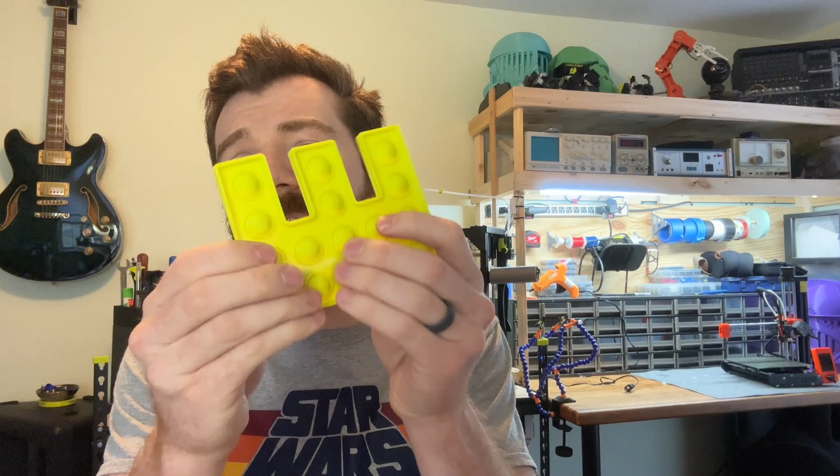In this video, I'm going to show you how to create your own custom 3D printed pop its using the Tinkercad design program. All right, now to start, we need a basic shape, and this is going to be the base of our pop it. And obviously in Tinkercad, you have a ton of different shapes to pick from under basic shapes and all the other categories.

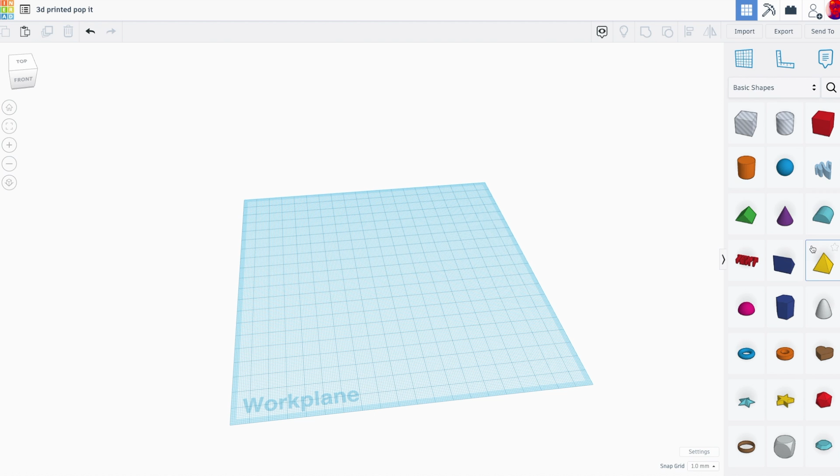You can grab letters and things and use your text box tools or create your own shapes using the scribble tool. I'm going to import a vector. Now you can create your own vectors using a free program like Vectr, V-E-C-T-R, which you can find on my website, or a more advanced program like Adobe Illustrator, or you can download vector images from loads of different websites. This is just a quick little vector E that I created.

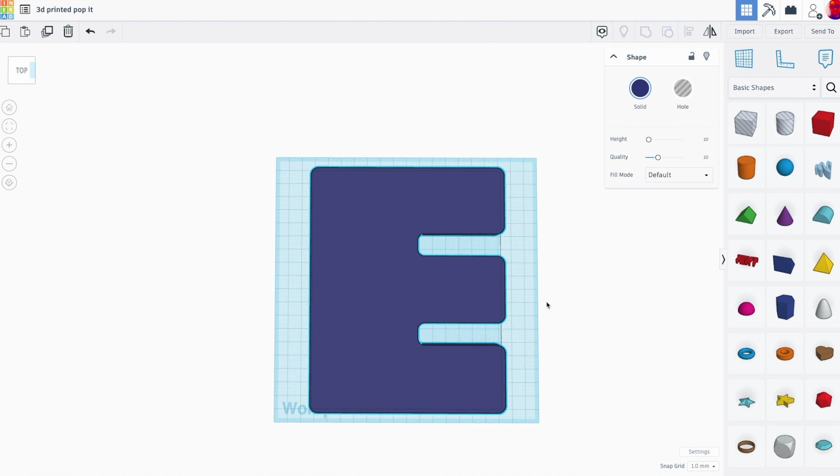Now, one of the first important things we need to decide is the size of our pop it. Now, I like to make my pop its around 5 or 4 inches, so I'm going to scale this thing down to be about 5 inches tall by about 4 inches wide, or 100 millimeters by 127 millimeters or so.

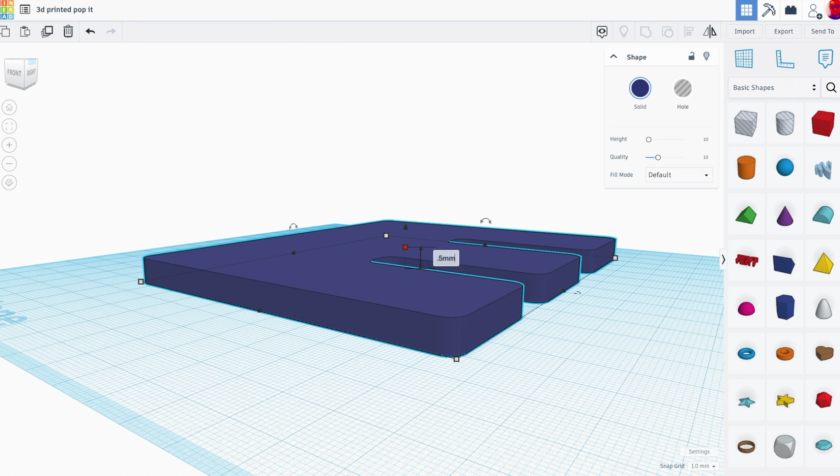Now, the next most important measurement is the thickness of our pop it base. So I'm going to set the base of our pop it to be 1.5 millimeters. And my initial layer is going to be 0.5 millimeters. So this is roughly 3 times the height of our initial layer, which is going to give us really good rigidity and really good bed adhesion. This isn't going to be the thickness of the pop it itself, but just a good thickness for the actual print.

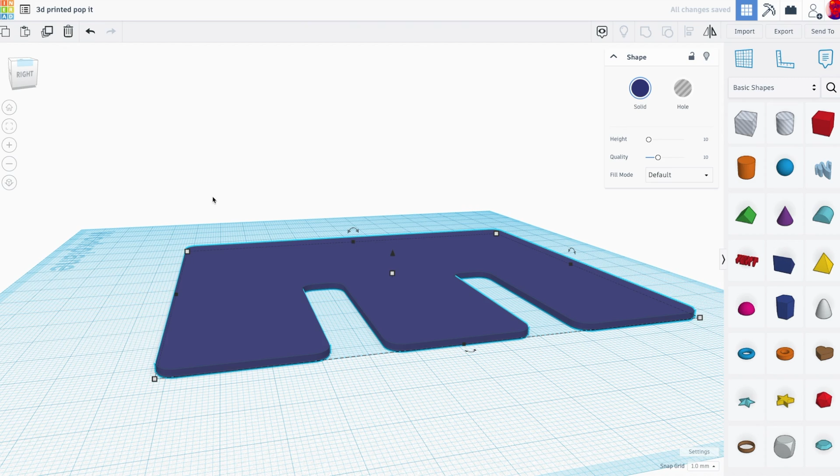Now, I'm going to duplicate this shape. And what I need to do is essentially create an interior offset. So I'm going to drag this shape in. And if I just change the color here so I can see what I'm working with, I'm going to drag the shape in to make it a little bit smaller all the way around to actually offset my shape.

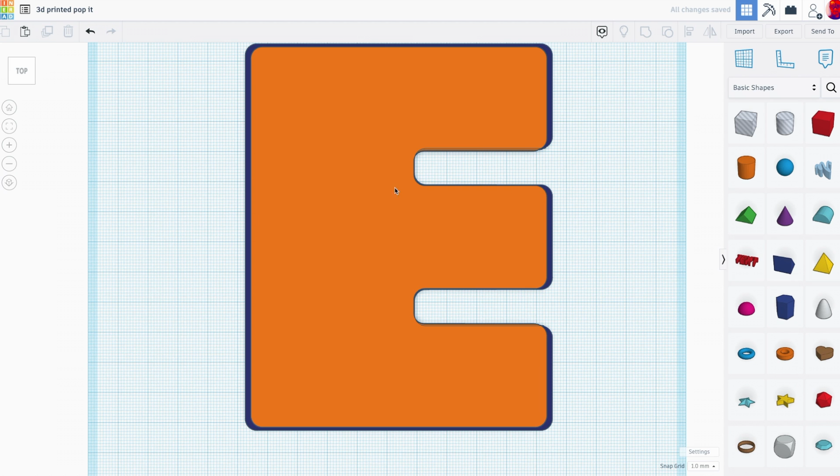Now, this works really great for the outside. Doesn't work super great for my E's. So if I center this, we can see that my outside has a good, pretty even perimeter, just like so. But my E's are a little bit off. So I'm going to actually separate this into multiple shapes. That's going to allow me to get a really good offset.

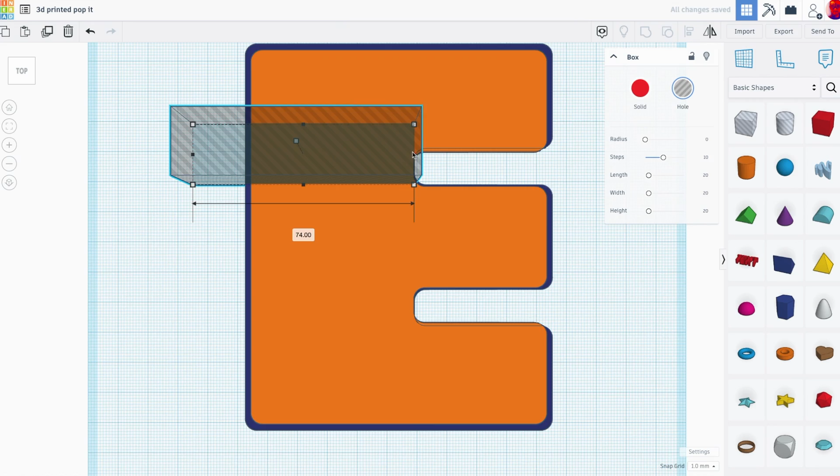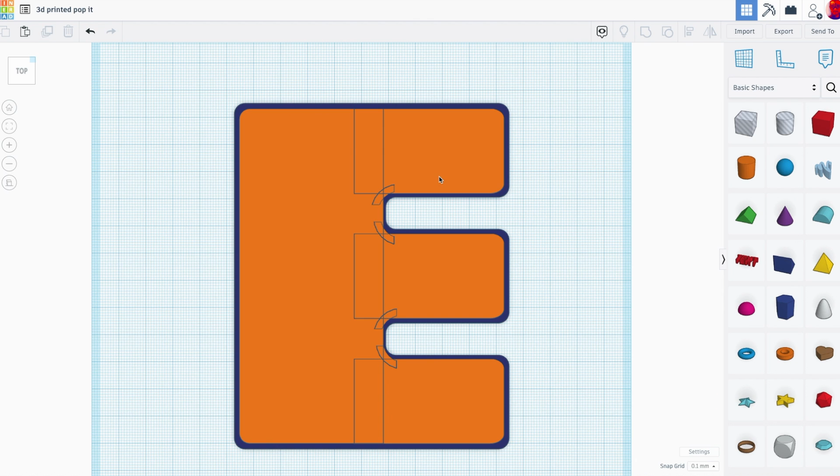Okay, so what I've successfully done is I've broken my shape up into multiple pieces and added some tubes here to give me a good interior version of my shape, which would have been a lot easier if I chose a basic shape or even if I created a vector outline manually. But in Tinkercad, breaking things up into smaller pieces allows you to do much more complicated things.

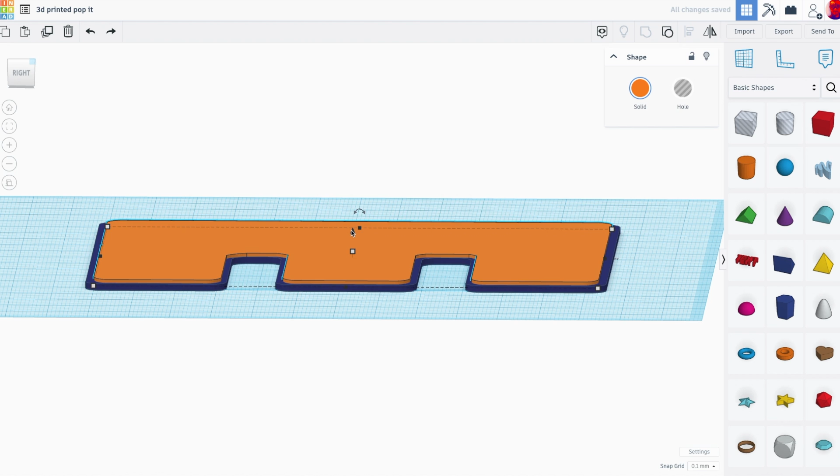So I'm going to select my interior shape, which is orange. What I'm going to do is I'm going to raise my orange piece so it is 1.5 millimeters off of the work plane, which should be right on top of the blue outer rim. I'm then going to make the orange piece very, very tall, and I'm going to make my blue rim 4 millimeters tall.

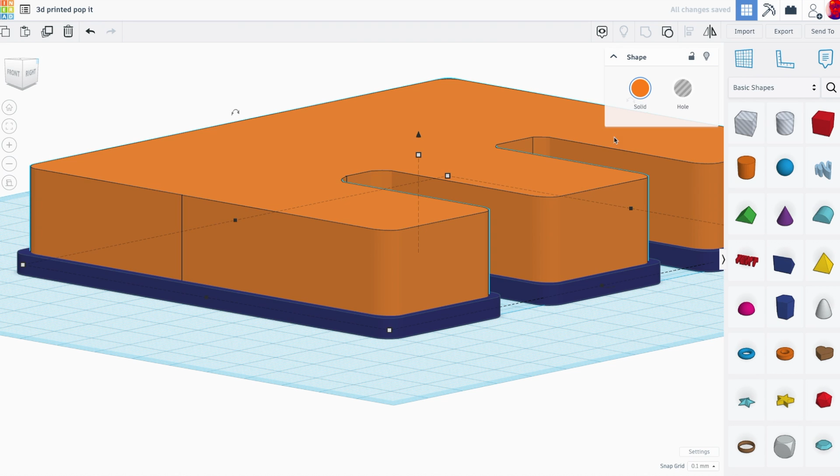I'm then going to turn my interior shape into a hole and group it with the blue shape, which now, if I make this lighter so it's a little bit easier to see, we have our original base with an outer rim. Pretty great. Now, the next thing we need to do is I need to go ahead and add rings around the actual poppets. So the rings are going to reinforce the poppet.

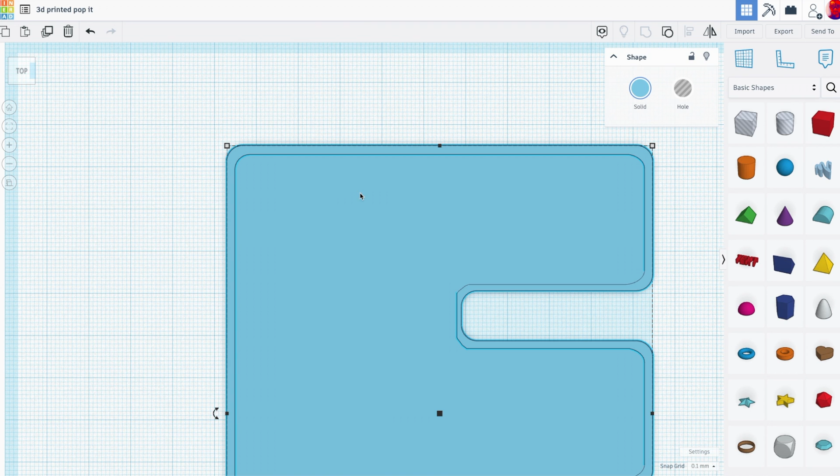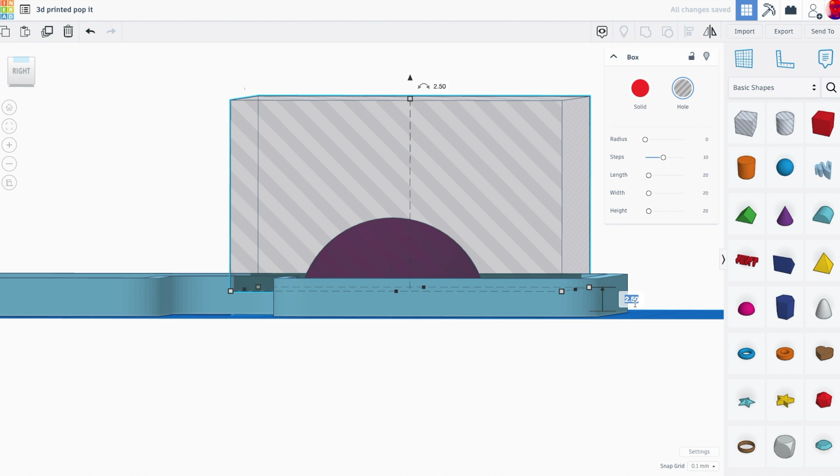So we're going to grab the hemispheres, and I'm going to set them to be 20 millimeters by 20 millimeters, which they already are, which is great. And I need to cut these so that they are just rings. So what I'm going to do is I'm going to grab a cutting box, and I'm going to lift it so it is 2.5 millimeters off the surface.

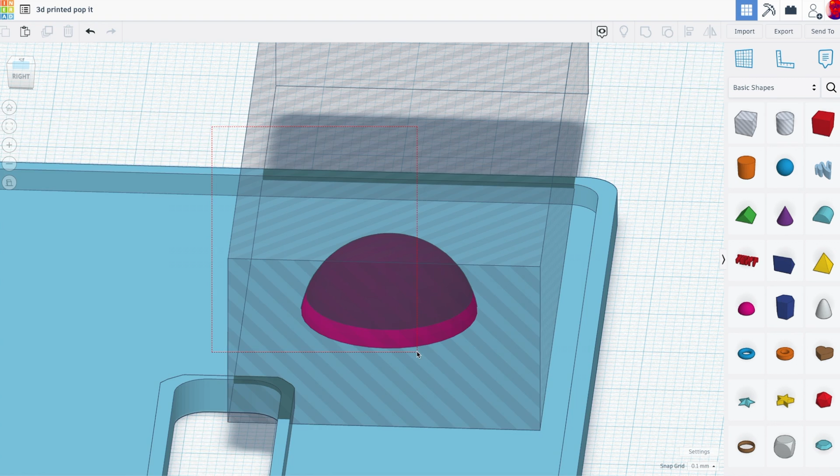Actually, let's make that a full 3.5 millimeters off the surface. Yep, that looks better. And I'm going to group that to my hemisphere, which will give us this kind of flat pancake-looking thing. I'm then going to hollow this out by duplicating this shape and making it 3 millimeters smaller. So I'm going to go to 17 millimeters by 17 millimeters.

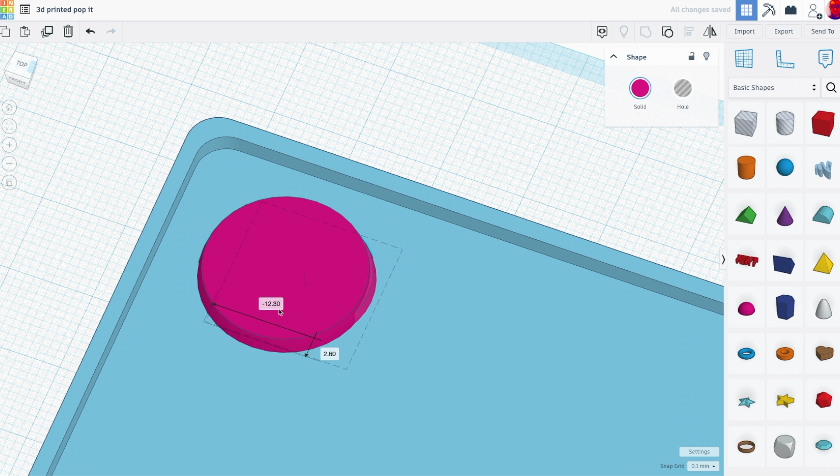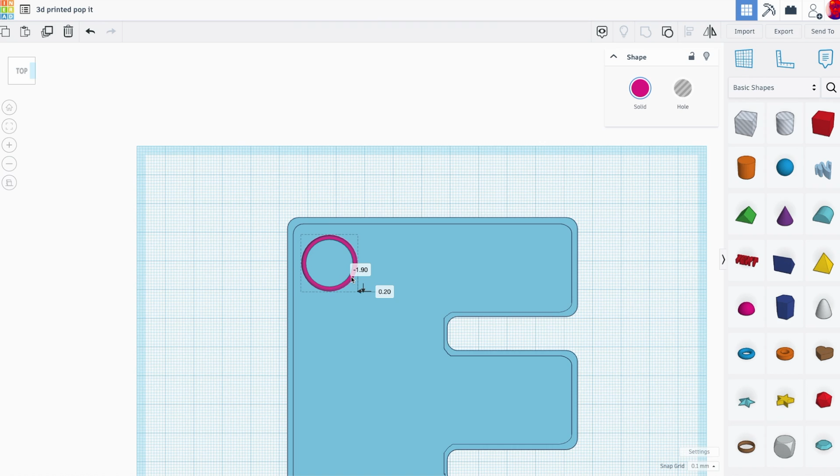I'm going to make it taller, and I'm going to center these shapes, hollow the middle one out, and group. And that's now going to give us this ring, which is going to reinforce our poppet. Now, what I'm going to do is I'm going to get this in place, and before we copy and paste this a bunch of times, we're going to create one poppet perfectly, then duplicate this a bunch of times.

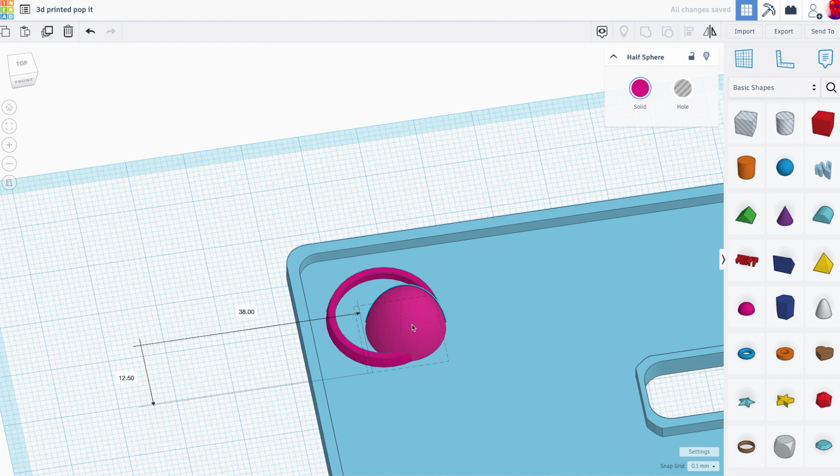So we grab a half sphere, and I'm going to dimension this to be 14 millimeters by 14 millimeters, which will eventually fit nicely in. And I'm going to lower this to be 7 millimeters tall. So that's going to fit nicely. Before we do that, I'm going to hollow this out with another half sphere.

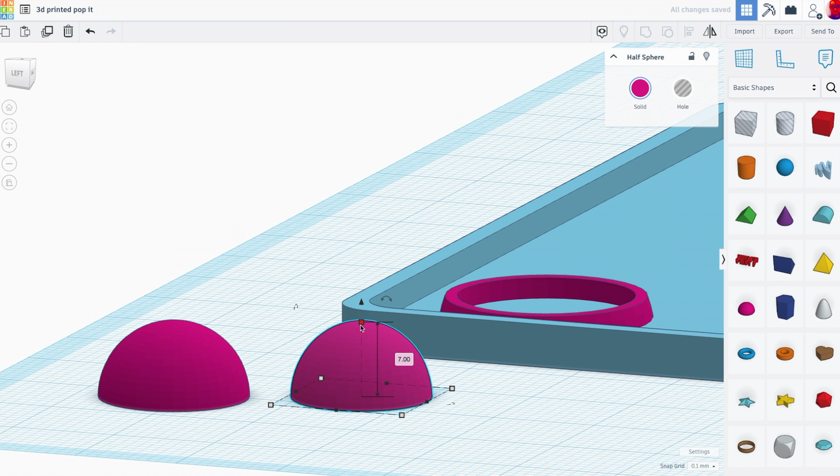So I want my wall thickness of my poppet, and this is an important dimension here for successful 3D printing, to be twice the thickness of my nozzle diameter. So I'm printing with a 0.5 millimeter nozzle. So I want my wall thickness to be 1 millimeter, which means I need to make this 1 millimeter smaller in every dimension. So I'm going to 13, 13, 6.

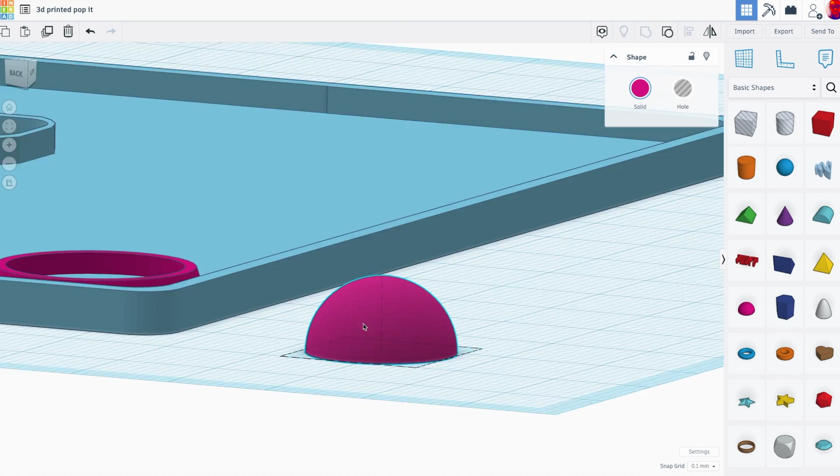I'm going to turn it into a hole, and I'm going to center these two shapes and then group them together. And that will give me my half sphere with a wall thickness of 1 millimeter, which is a really important dimension. Now I'm actually going to ungroup these two shapes so they're back to being an inner half sphere and an outer half sphere. And we want to leave that ungrouped for now, just while we get everything aligned.

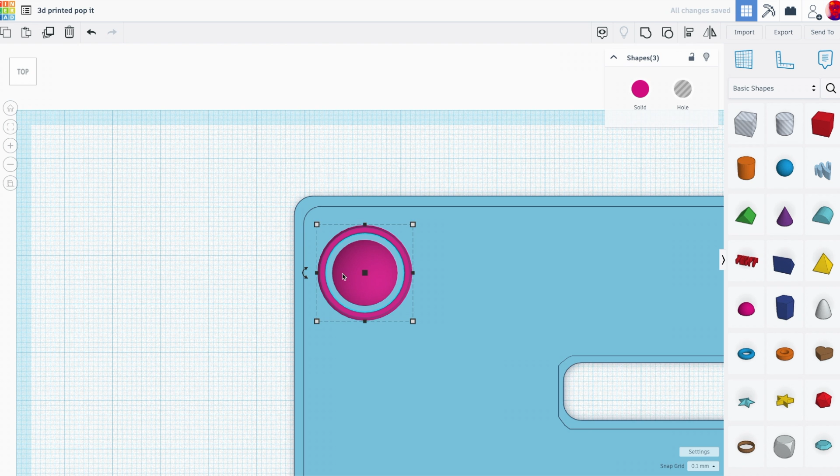So I'm going to use my alignment tool to align these three shapes. That's an inner cutting half sphere, an outer half sphere, and my ring. And then I can use the duplicate tool to get these in line. Now I can fit 4 columns and 5 rows on my shape. I just need to delete these extra 4 poppets that are off my shape. And what we're going to do is we're going to group everything together.

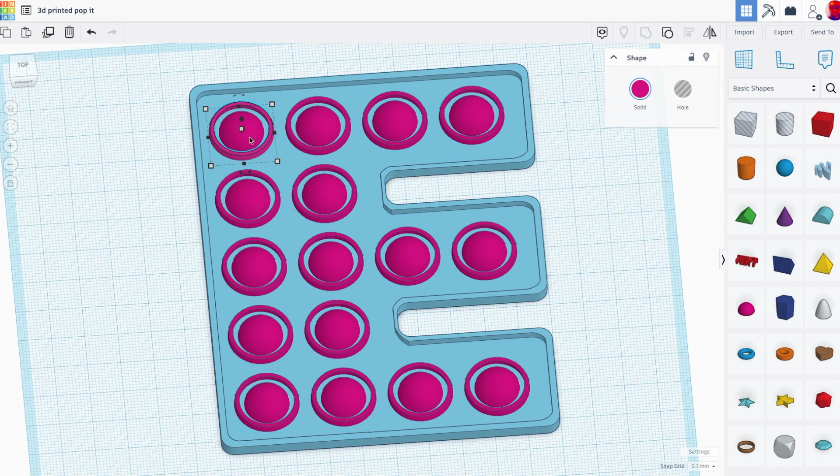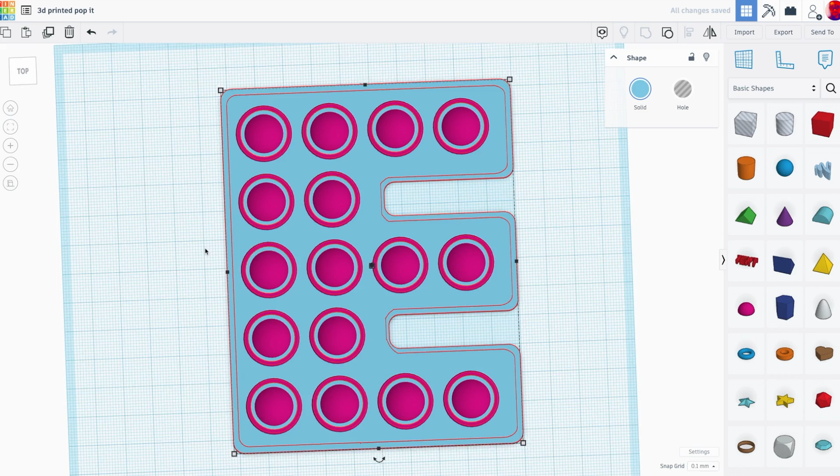And we're grouping our base, the rings, the outer spheres and the inner spheres, which we didn't group. So if you look at this from the bottom, you can see that we still have our cutting spheres. We ungrouped that before, so now when we group all of the shapes together, which for me is 49 shapes, it's going to not only merge the poppets with the base, it's also going to cut the spheres into the base. So if we look at this from the top, we have our poppets reinforced with our rings. If we look at this from the bottom, we have the inside of our poppets that is ready to go.

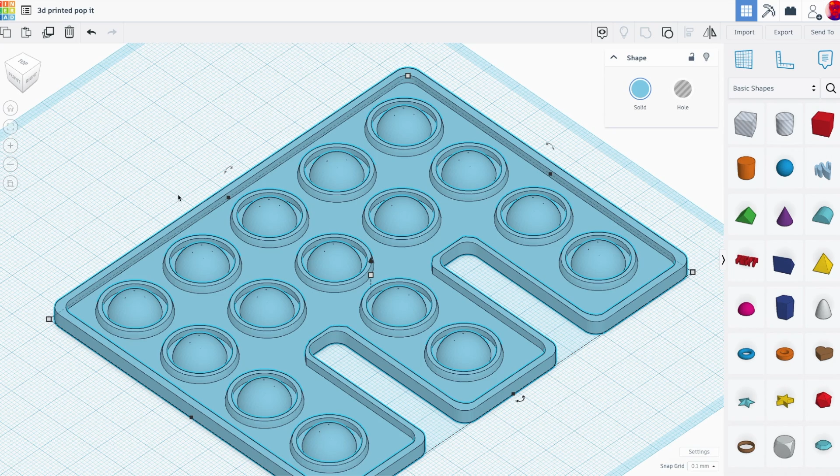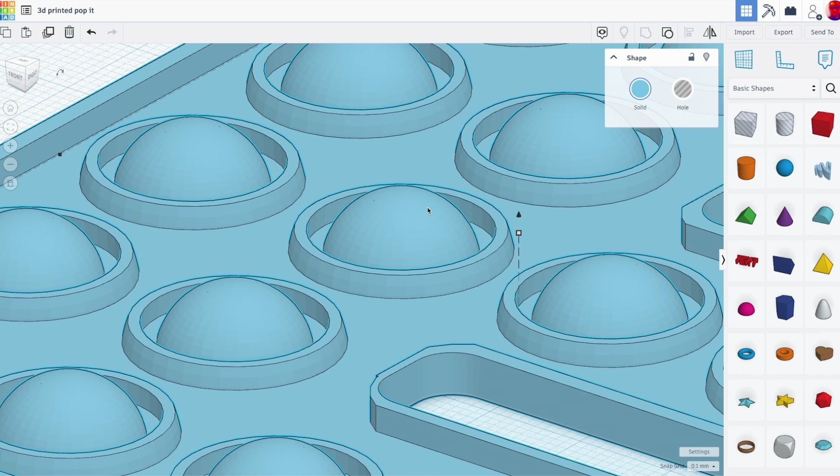And then my actual poppets themselves, the wall thickness of this half sphere, is twice the thickness of my nozzle diameter, which is 0.5 millimeters for my nozzle. So this wall thickness is 1 millimeter. And that has given me some really consistent results. So next, we export this as an STL and drop it into our slicer to prepare for printing.